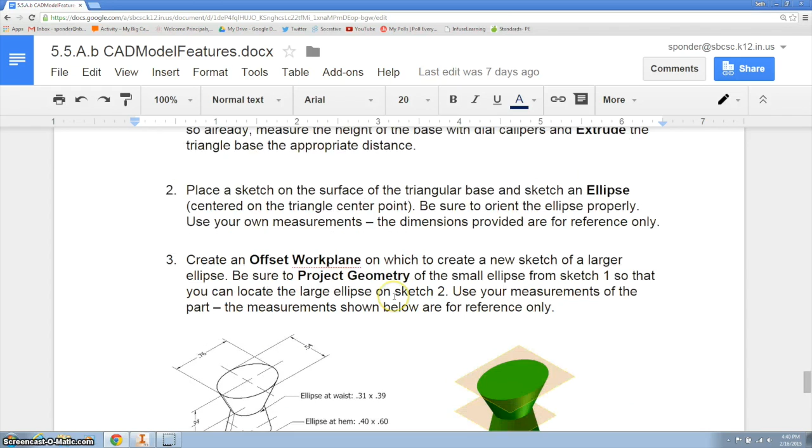Today we're going to be working on this female Automoblox, and we're going to start out with a triangle, following some of these directions. I think if you follow my video, you'll have more clarity than these instructions give you, so feel free to do whatever works best for you. You'll have an extra credit opportunity if you can make these arms going off the side. I'd encourage you to do one of them using the loft tool and then just mirroring it on the other side. That's how I would do it.

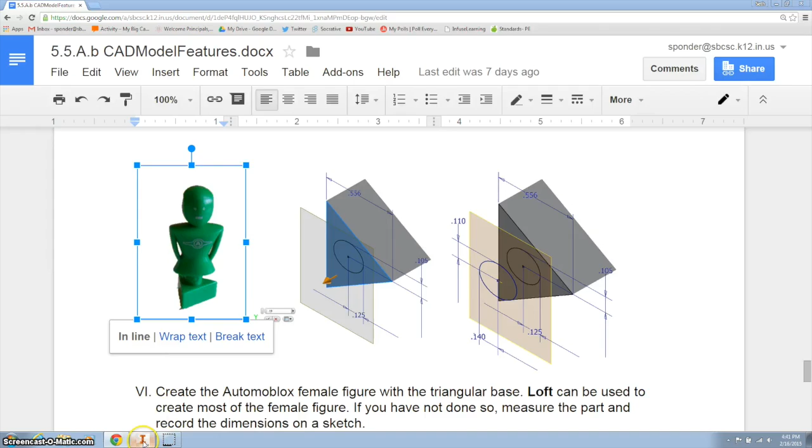Alright, so we're going to start with a part and make a 2D sketch on, let's pick the XZ plane, and then we're going to do a polygon with 3 sides.

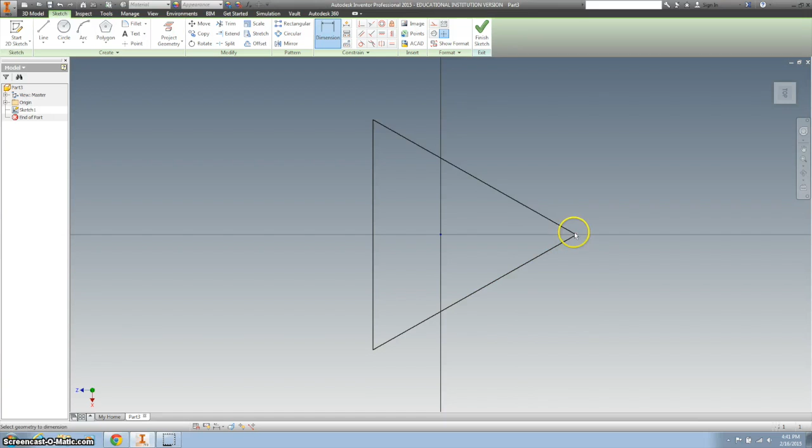Stick it right there, so we've got our triangle for the base, and I'm going to click on corner to corner, and I'm going to type in 0.556.

Let's do this. Take a line, take it this way, hit escape, and I'm going to make this and this perpendicular. There you go, now it's going to work. And then I'll just delete that line.

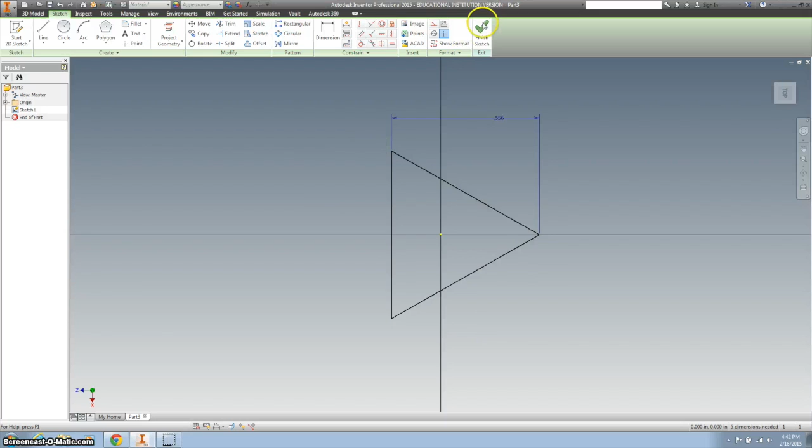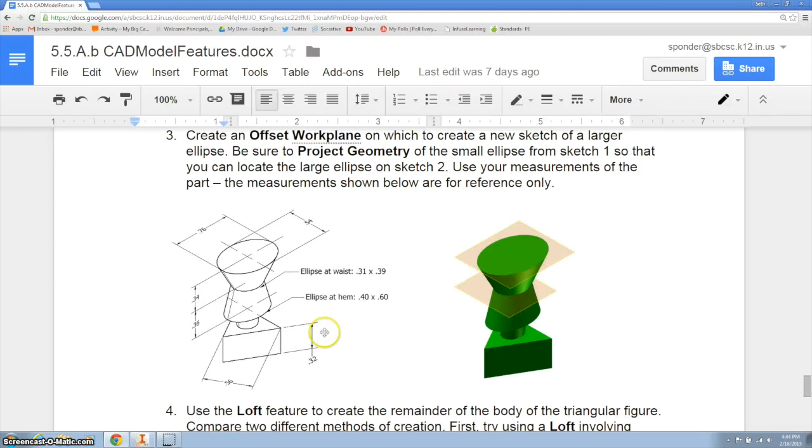Alright, I want to finish this and extrude this, going down, here's where it tells us 0.32. So sometimes you got to reference here, and sometimes you have to reference here. Alright, so going back to my drawing, make that 0.32.

Alright, now let's create a new sketch right on top of there, and we're going to be working a lot with ellipses. So I'm going to hit the down arrow on the circle, hit the ellipse, start it right at the center point.

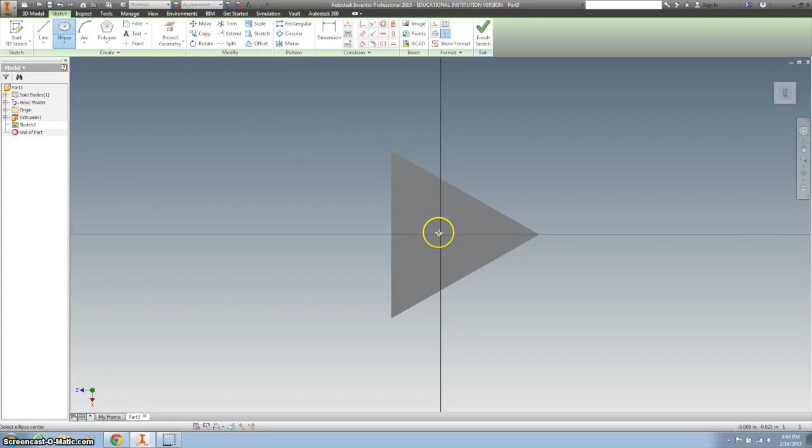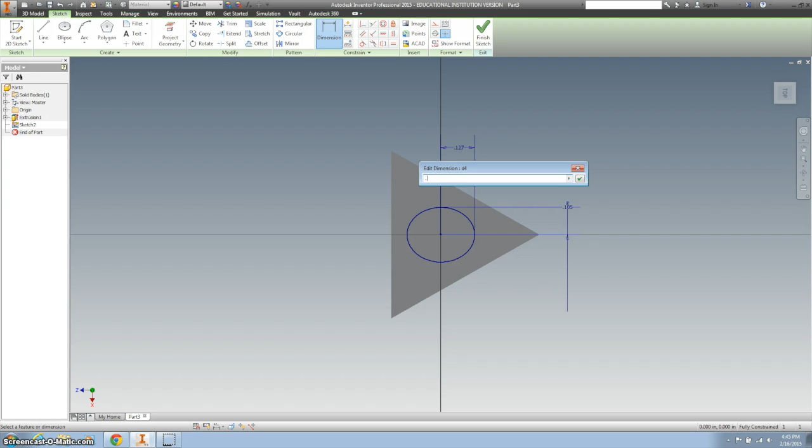Up and over, and so this dimension we want as 0.105, and then this dimension we want as 0.125. I'm just going to drag that below.

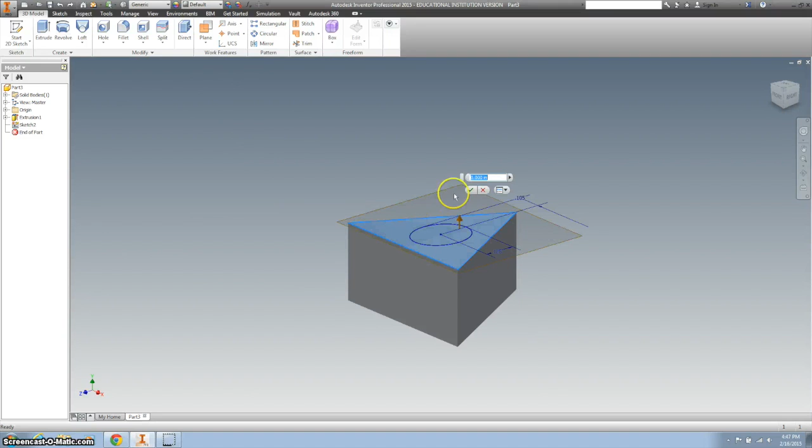Alright, so we've just made our first ellipse, and now we want to use this plane, but we want to offset the plane. So we're going to click here, and we want to offset it 0.19.

Then we want to create a new ellipse on top of our new work plane. So I've got to kind of move my mouse around, click on it, click new work plane, and create an ellipse. I'm going to center that on the same dot, and I'm going to exaggerate the size a little bit just so I avoid the other one.

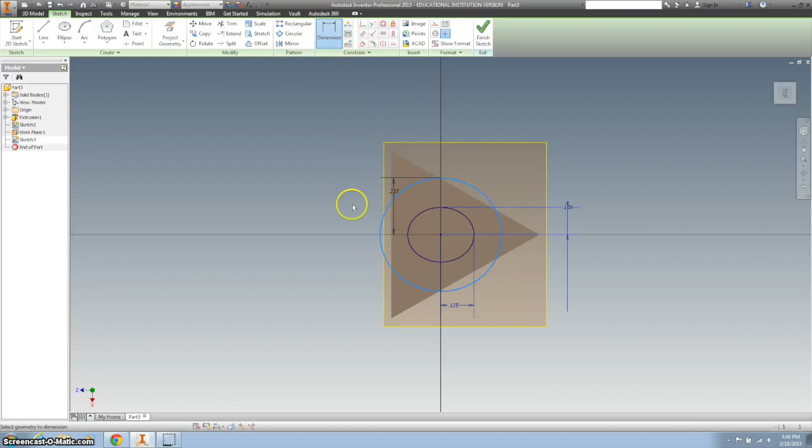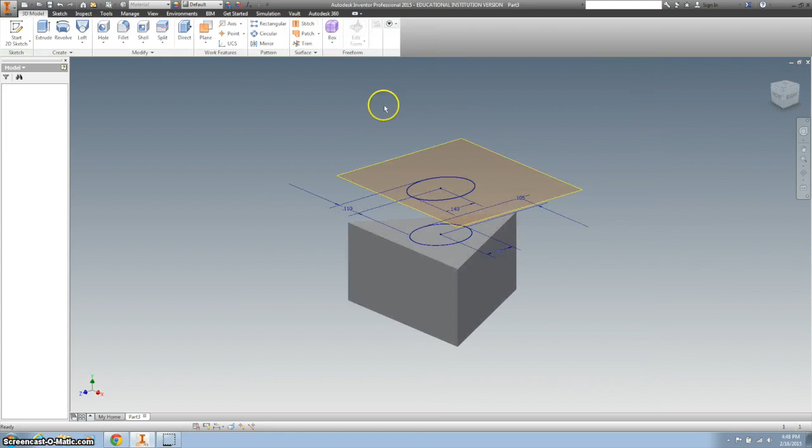I want this to be 0.110, and I want the major axis to be 0.14, finish it, and then loft.

So I'm going to hit this to make it red. I'm going to click on the area inside, and then I'm going to click to add there, and OK, and I think I've got it right.

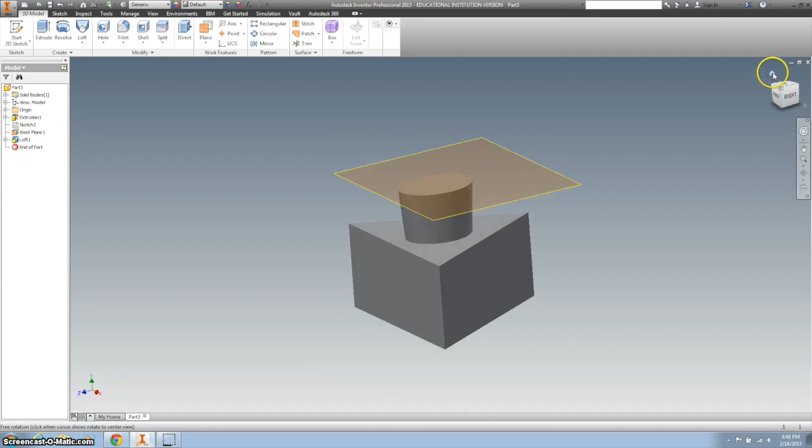Alright, and we're going to pretty much do this a couple more times.